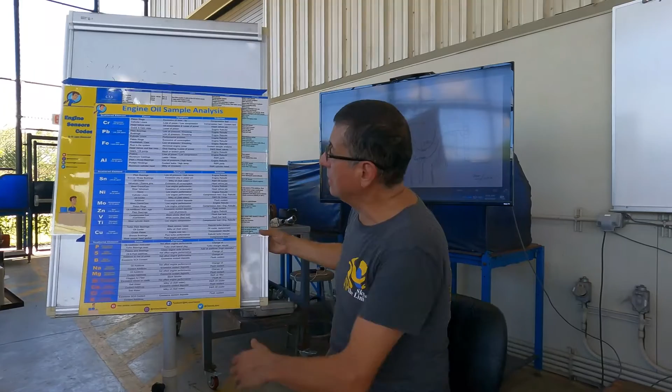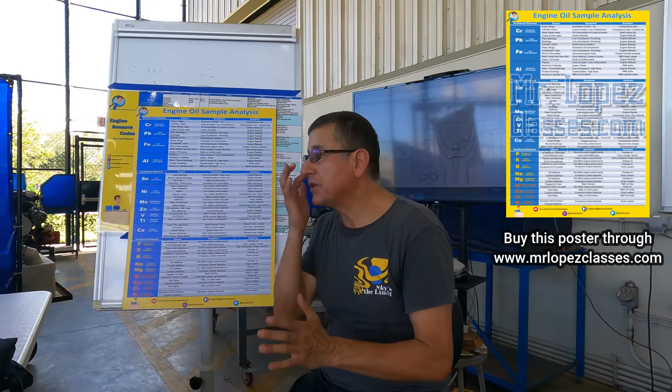Of the oil using my table, because it's easy to identify problems. Once again, as soon as you receive the report, they mark in red color, or they say those elements are in high level. We are going to analyze the most common metals dispersed in the oil sample that produce problems.

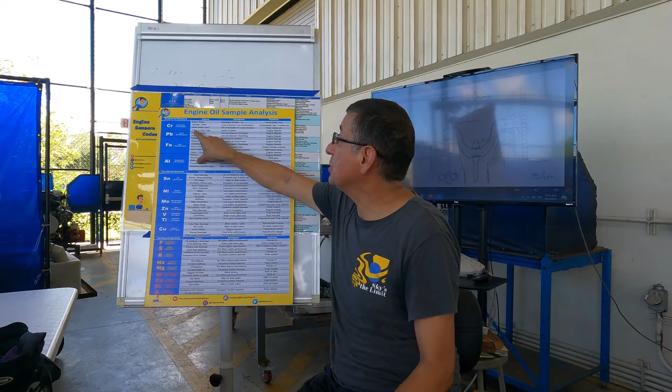The number one is chromium. What happens if chromium is, according to the report, over the limit? I have problems in the piston rings, I have problems in the cylinder liners, I have wear on the head valves, or crankshaft or camshaft wear. The metal wears because of lack of lubrication in that area, and the metals touch.

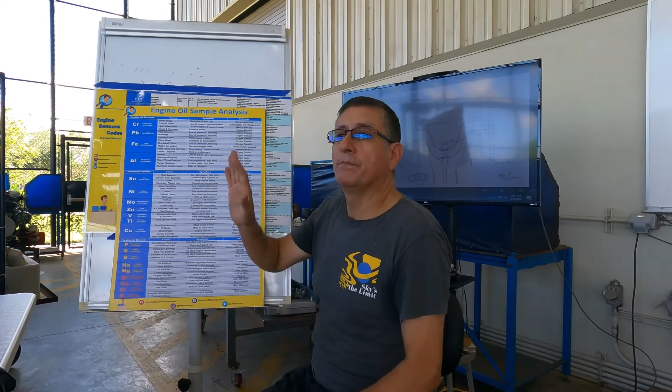Symptom: if the piston rings are worn, what is symptom number one? Blow by and low compression. What is the meaning of blow by?

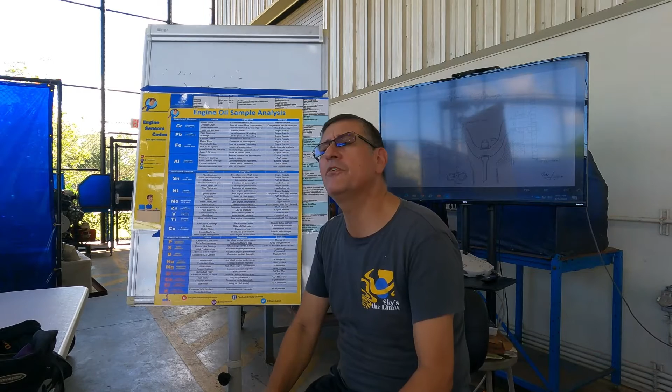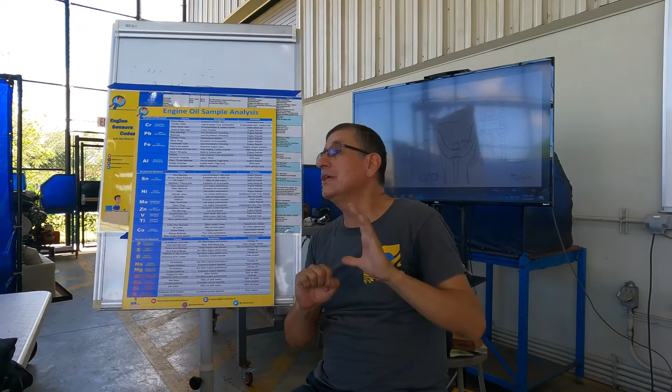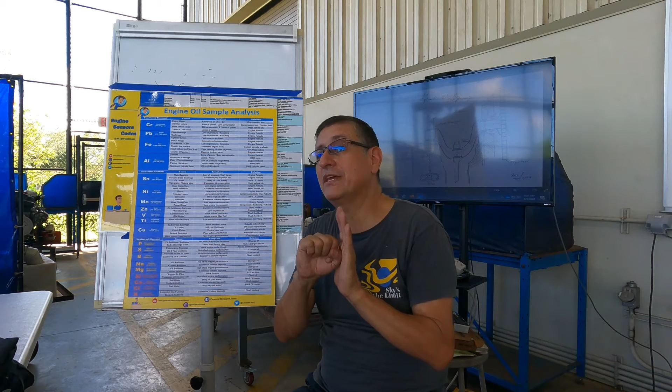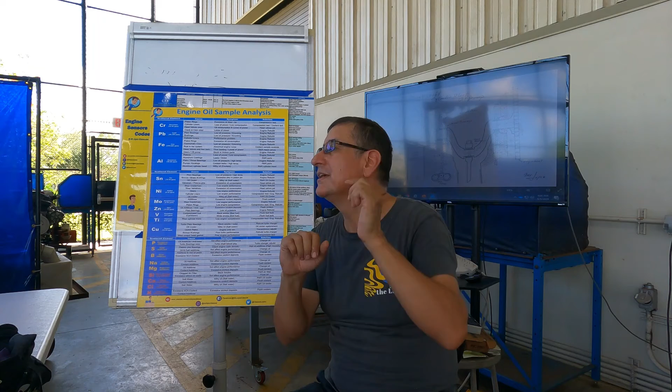Who can explain to me what is the meaning of blow by? Pay attention. You remember that when the piston is going up with both valves closed during the compression stroke, it tries to compress the air in diesel engines, or compress the air and fuel in gasoline engines. When the air is fully compressed, some degrees before the piston reaches the top center, the injector injects the fuel and produces the explosion.

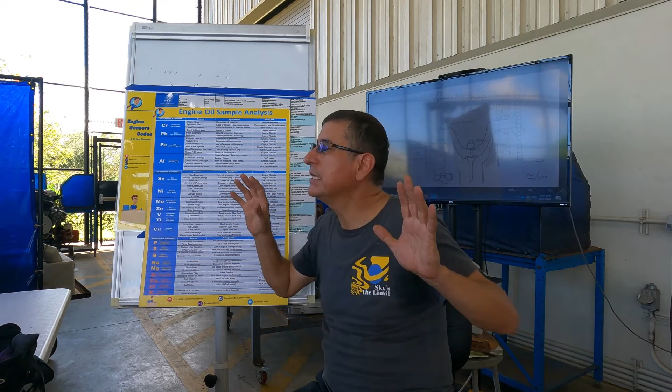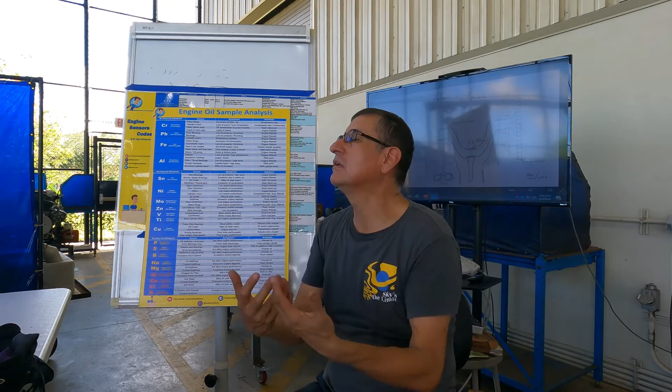What happens if I have blow by? If I have blow by, Susan, it's because I have leaks. The piston rings don't produce a good seal, and when the piston is going up, a lot of air or mixture goes down and enters the crankcase, the oil pan, and splashes oil. This is blow by.

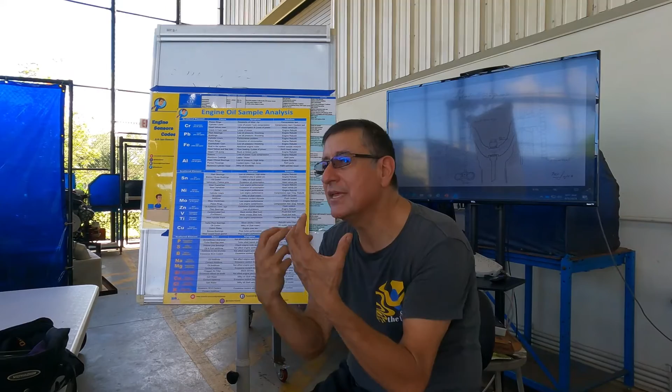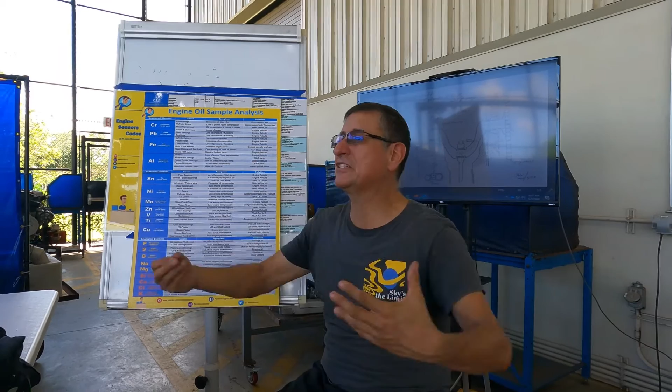How can you see visually that you have blow by? You can take the cap off. If you remove the cap of the valve cover, you see a lot of gases coming out and a lot of splashed oil coming out. That's not normal. This is the symptom: blow by and low compression, of course.

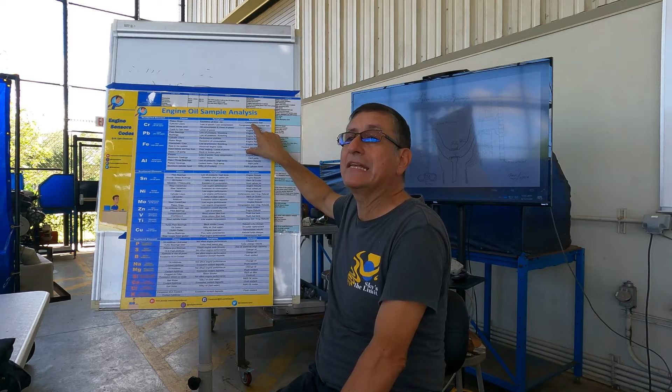And what is the solution? Check compression test, number one, and verify with the compression test if the problem is on the piston rings or if the problem is on the valves, and fix it and repair the engine if it's necessary.

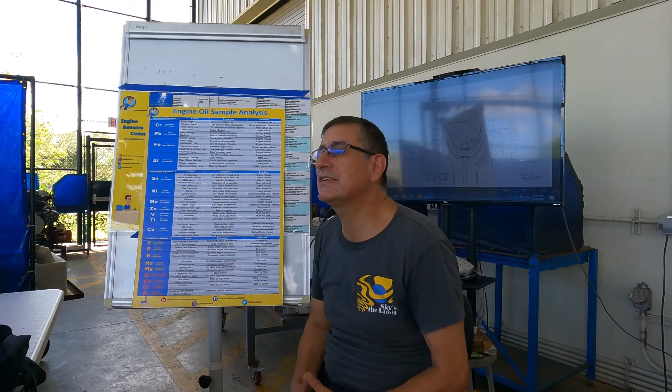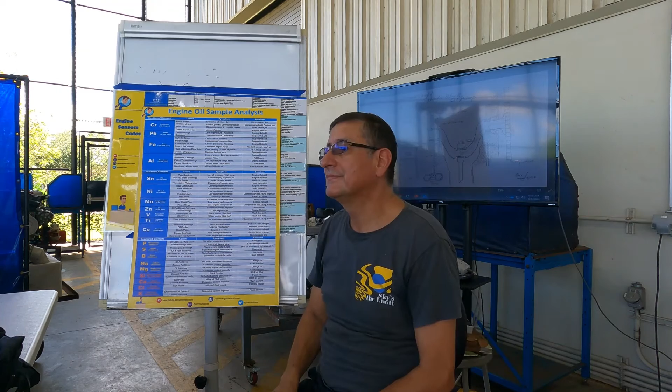Number two, I have an excessive amount of chromium because the cylinder liners are worn. Once again, loss of power, low compression. Once again, compression test and coolant test, both of them, if you have suspicion that it's on the cylinder liners.

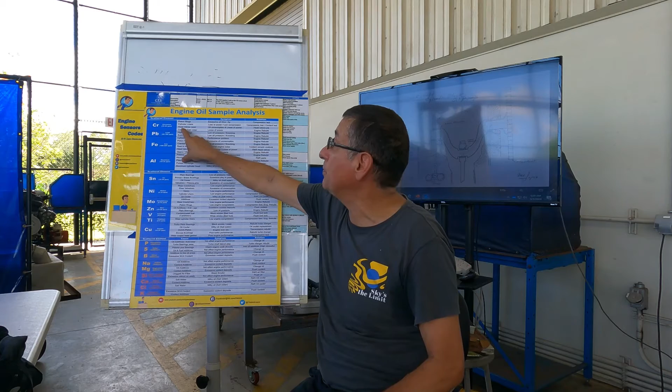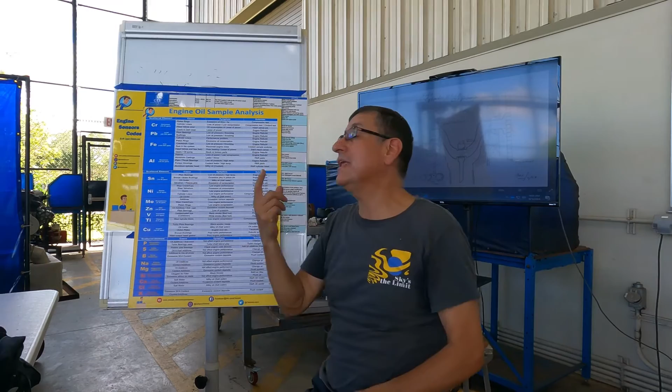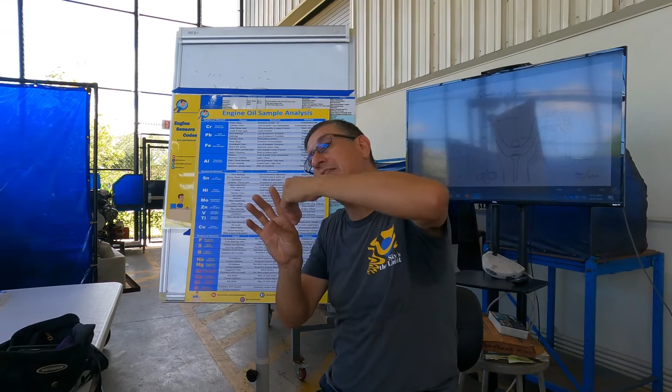Excessive amount of chromium is also possible because you have wear on the head valves, between the head valves and the guides of the valves, where the valves are moving. What happens if I have too much play between the valves and the valve guide that you repaired yesterday? The valve is moving, and when the oil reaches the rocker arms, the oil penetrates and enters the combustion chamber. Of course, the seals that you replaced yesterday are...

...too much play or broken. Yesterday you had two of them broken. For sure, in those cylinders the oil enters. That's clear? And of course, you have blue smoke, a lot of blue smoke.

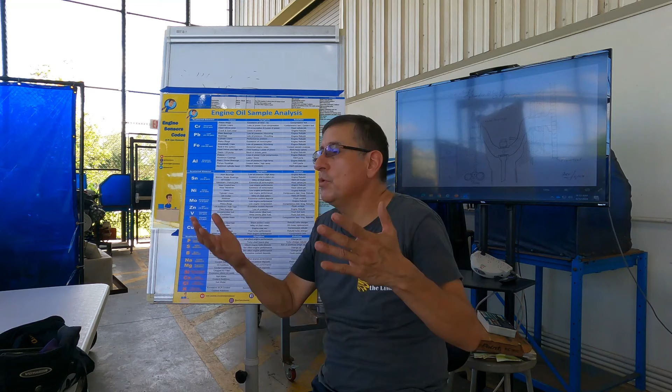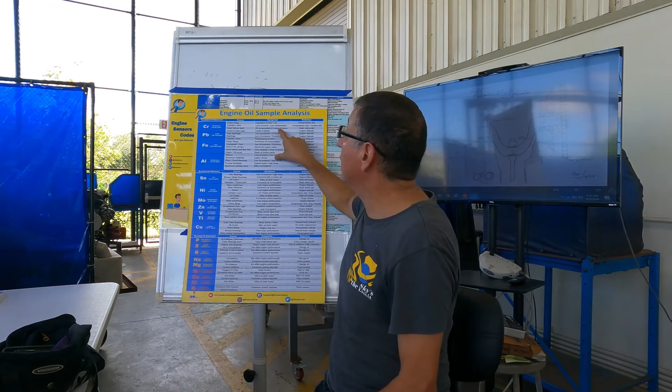Oil consumption. Yes, oil consumption, because the oil penetrates the combustion chamber and is burned. And loss of power. What is the solution? Head valve job, the job that you did yesterday.

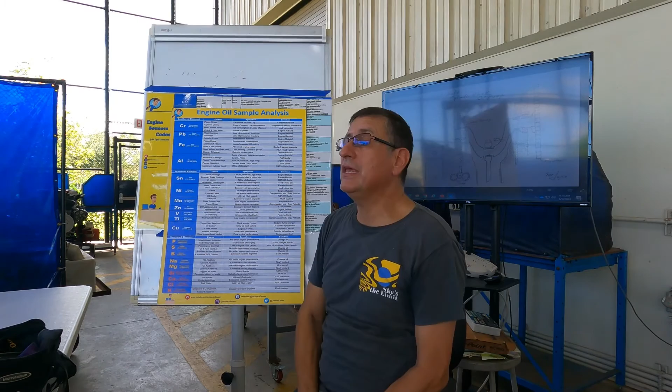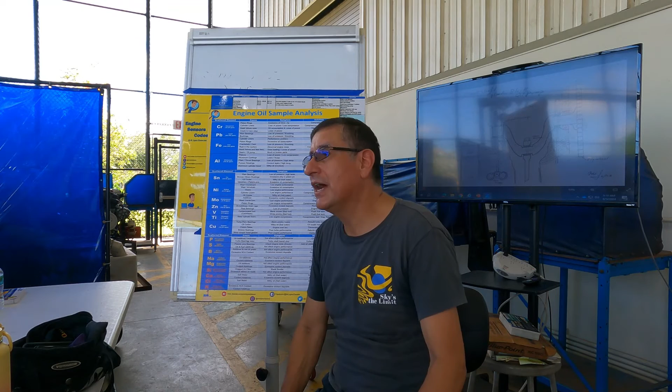What happens if the problem with the amount of chromium is because of wear on the crankshaft and camshaft? How can I determine if I have wear on the crankshaft and camshaft? For sure, I have the oil pressure gauge low, indicating low, or the engine starts, runs a couple of minutes and shuts down, and the code says low oil pressure.

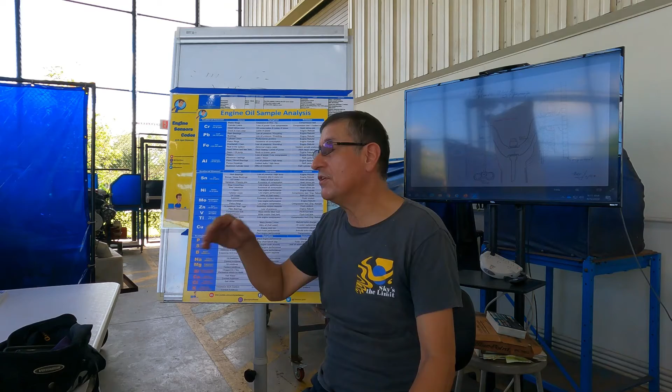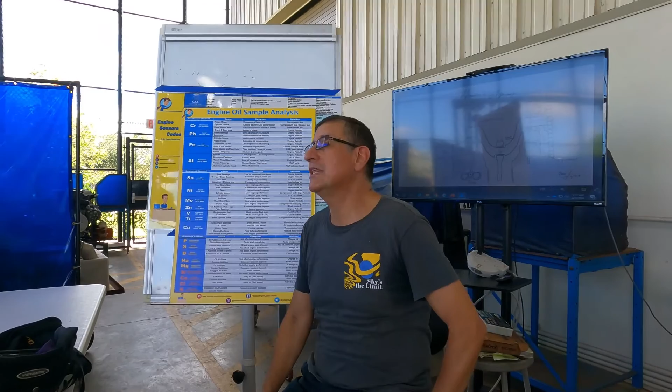For sure, you have wear on the bearings, and if you run the engine for a long period of time with low oil pressure, you damage the metal. You damage the metal of the journals in the crankshaft, and now the metal is worn, and you have chromium suspended in the oil sample. Loss of power, rebuild the engine. Rebuild the engine, the solution.